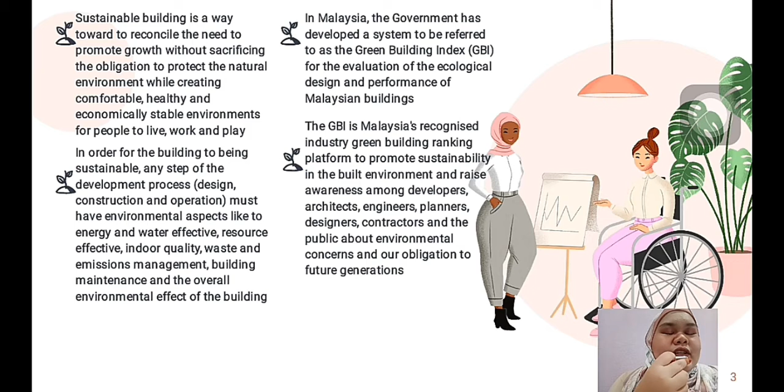Let's proceed to the challenges in managing construction activities in relation to sustainability.

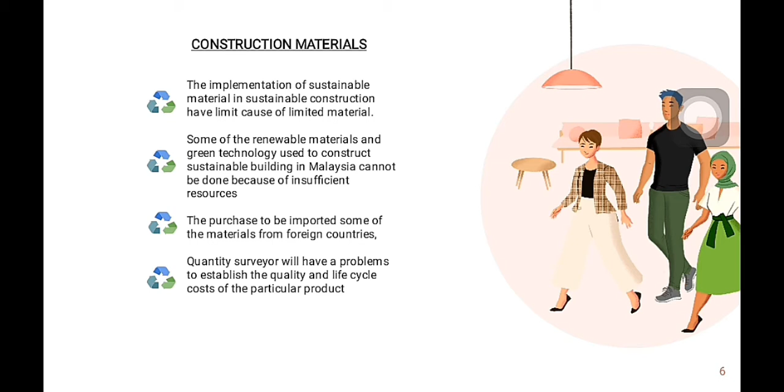First, challenges in construction material and costs: the implementation of sustainable material in construction has limits because of limited material. Second, some renewable materials and green technology used to construct sustainable buildings in Malaysia cannot be done because of insufficient resources. Third, the need to import some material from foreign countries. And lastly, the quantity surveyor will have a problem establishing the quality and life cycle cost of a particular product.

Challenges in construction costs: firstly, a higher level of green certification means higher costs, up to 30% more, to be paid for mechanical and electrical equipment installed to achieve energy and water efficiency. Next, extra expenses are incurred for hiring an environmental advisor.

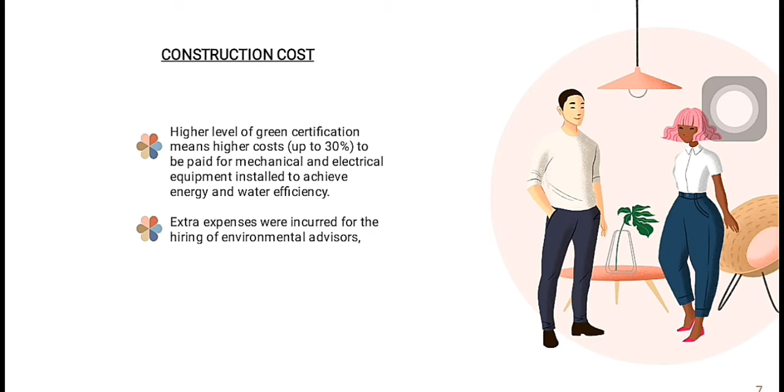For construction method and technology, firstly, the main challenge in sustainable building is the technical difficulties experienced during the construction process. There is a higher risk that errors and delays will occur due to lack of experience with the skills possessed of the construction method. Most architects still have low integration into the sustainable design process.

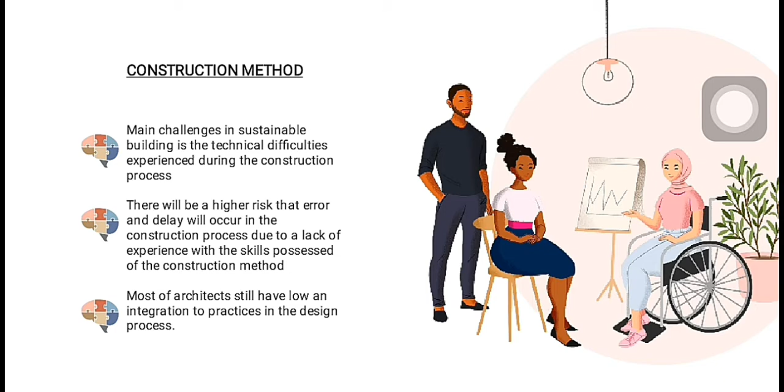Challenges in construction technology: there is a lack of sustainable technology in Malaysia. There will be higher risk that errors and delays occur in the construction process due to lack of experience with the skilled processes of the construction method.

Acceptance of new technology in construction is usually slow at the beginning due to lack of confidence. Stakeholders such as developers are not confident to invest in the high capital cost of sustainable technology because it affects construction costs. The project must have the technical capacity and financial capability to support the application. Some reasons new technology is expensive include lack of competition and commonly manufactured abroad, lack of knowledge or technical expertise, and lack of familiarity with the product, material, system or design.

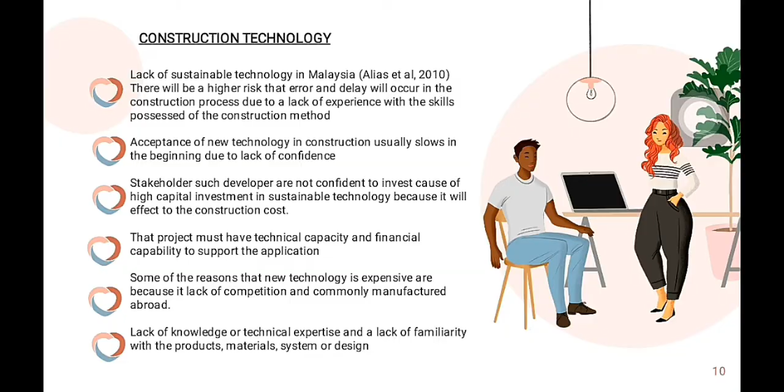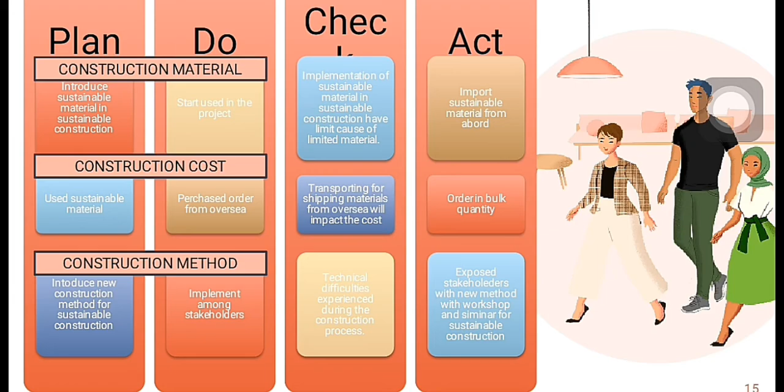Then, the role of the contractor. They must take action to do the construction work required until completion of the project. They do not always have the expertise needed, especially in construction.

In green building construction, they have to hire subcontractors or special workers able to accomplish parts of the project. They must make sure the workers appointed have the skills, knowledge, and experience, and train them to carry out the work. Contractors must ensure workers under their control receive supervision and instruction.

Then, the consultant. The consultant must participate in developing and implementing every element of the safety and health program. Consultation is required when an opinion is needed regarding any technical problems arising from the consultant team.

The situation may take varying amounts of time depending on the nature of the issue. It is the responsibility of the consultant team to study the problems in the feasibility study or in the field during the construction period. The consultant also needs to apply their knowledge, skills and experience at various stages.

Especially, safety measures shall be effectively implemented in respect of workers, materials and machineries.

Next, the supplier. The supplier will supply all the materials and goods to the construction. They must make sure all materials follow the specifications and quality. If they use bad quality or wrong materials at the site, there will be problems in future and wastage of construction cost.

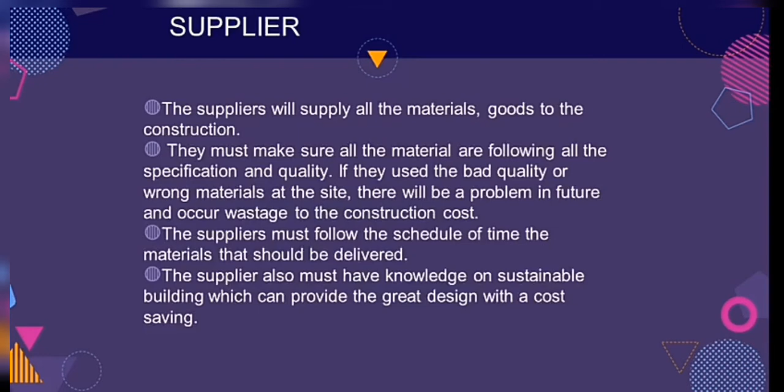The suppliers must follow the schedule of time for material delivery. The supplier also must have knowledge of sustainable building which can provide great design with cost saving.

Next, the construction worker. Their job is to do their work at the site until completion of the project. They must follow every order or instruction from the main contractor so they do the right work according to their speciality and skill.

They also must have good planning and organizing skills, as green building construction requires a longer time to be constructed. Last but not least, the authorities are the ones who give approval for construction, from start until completion. The responsible authority in sustainability in Malaysia is called CIDB, the Construction Industry Development Board Malaysia.

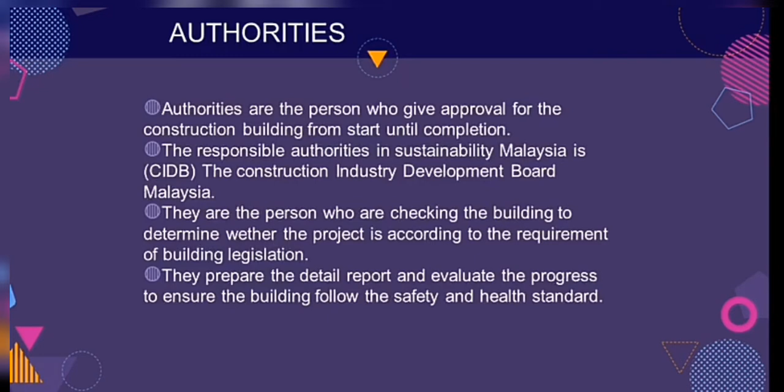They check the building to determine whether the project meets building legislation requirements. They also prepare detailed reports and evaluate progress to ensure the building follows safety and health standards. Thank you, that's all from me.

I will present recommendations to improve the current situation based on the challenges. Challenges regarding construction material and cost consist of insufficient resources in Malaysia.

In that case, stakeholders should work closely with research institutions to research various environmentally preferable construction materials and products. Second, under construction material and cost: problems establishing the life cycle cost of a particular product.

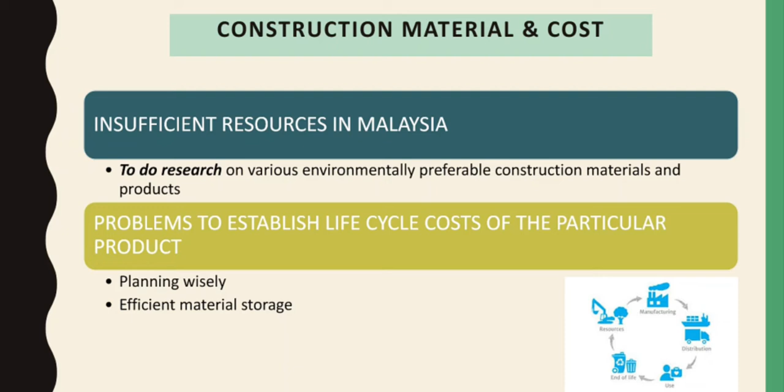This happens when products have to be purchased from overseas. So the management team has to plan it wisely, and it is also important to implement efficient material storage to keep the product in good condition.

The third challenge under construction material and cost is the higher cost of sustainable construction materials. CIDB can enforce a standard guideline for local manufacturers regarding the production of sustainable products, stating that products should be made from reusable materials gained from construction industry waste.

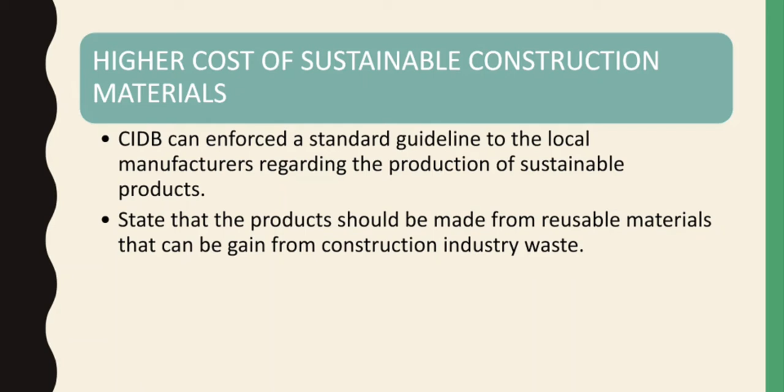For construction method and technology: the complexity of construction techniques and processes involved in managing the construction site to improve the environment.

For example, local authorities have to enforce guidelines regarding environmental practice such as for earthwork methods. This is important because development should be done in phases to reduce environmental impacts during the earthwork stage.

Second, controlling waste management such as separating and recycling waste. Construction waste can be recycled and reused for future sustainable development.

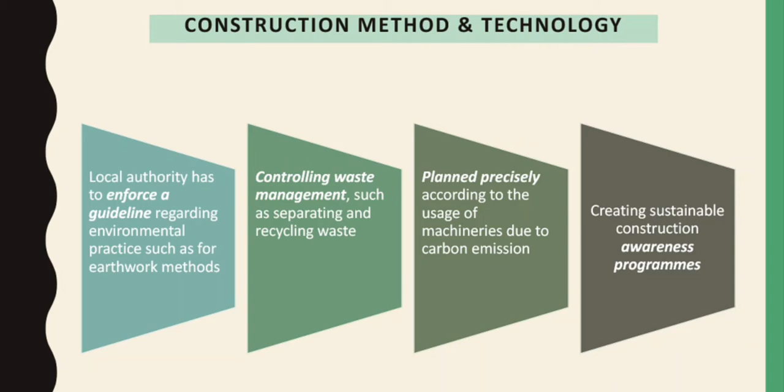Third, plan precisely according to the usage of machineries due to carbon emissions. Fourth, create sustainable construction awareness programs due to the lack of familiarity and knowledge about sustainable construction methods and technology among local contractors.

For changes in working environment procedures, the recommendation in terms of communication is that contractors have to train workers by organizing training programs to raise their understanding and awareness of sustainable construction.

For leadership, good leadership skills need to be possessed by the project manager by setting self-standard regulations, and developing a roadmap with short, mid and long-term objectives to accelerate the implementation of sustainable construction.

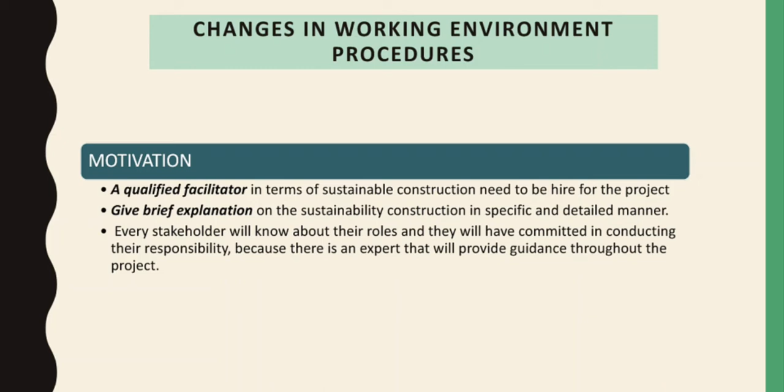It is necessary for construction stakeholders to stay motivated throughout the construction progress. However, low motivation can lead to low production and output, resulting in failure. For this reason, a qualified facilitator in sustainable construction needs to be hired for the project, to give a detailed explanation of sustainable construction so every stakeholder knows their roles and stays committed, since an expert will provide guidance throughout the project.

First, I will explain innovation. Innovation means a positive change in the status of a certain system, and it manifests in various forms depending on the nature of the system or object it relates to. Planning an innovation platform starts with a strategy that addresses culture, change requirements, and high-level allocation of resources and leadership. Most construction innovation activities are carried out at the project level and require cooperation among different parties.

The next topic is innovations that can be implemented in future projects. The first is bamboo reinforced concrete, a natural alternative to steel reinforcement commonly used in most countries. It is more environmentally friendly and creates flexibility within the concrete, enabling it to better withstand earthquakes. It also absorbs a lot of carbon dioxide and has higher tensile strength than steel because its fibers run axially and it is flexible.

The second innovation is breathe bricks, which act as a secondary layer of insulation. This pollution-absorbing brick can remove 30% of fine particles and 100% of coarse particles. These bricks are composed of two key parts: concrete bricks and a recycled plastic coupler. The surface of the bricks helps direct airflow into a cavity to remove pollution. Breathe bricks are a cost-effective way to reduce air pollution, as they require no further maintenance once installed.

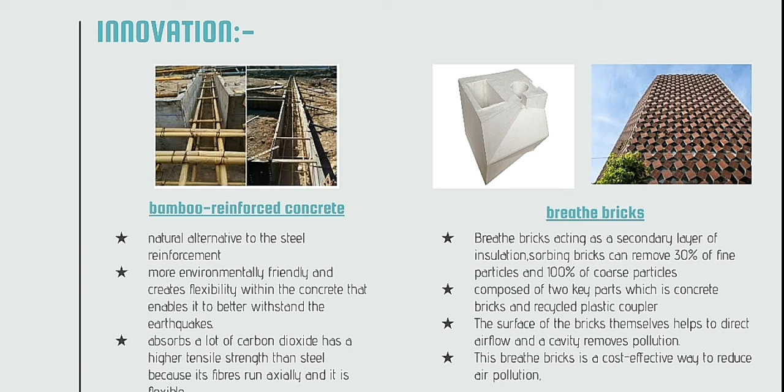The next innovation, especially for tools, is changing PDCA to PCDCA. In these tools, we introduce a 'C', for check, after 'P', for plan, to check first if the plan is ambitious enough. In other words, before the 'do' phase, the project team should set expectations on the outcomes of 'do' in terms of innovation. Otherwise, the outcome will solve the problem, but is unlikely to be innovative.

First, continue with the plan, followed by do, and deliver the improvement. Revisit the plan and modify it until it is capable of delivering an innovation. The plan depends on the combination of the problem definition and the solution chosen by the team, and clearly indicates whether the result will be innovative or not. Adding a check after the plan sets the right expectations for the project.

The last innovation stated here is sustained focus and interest over a long duration for the team. Similarly, the PCDCA approach needs more tools to ensure managers are able and allowed to focus and invest the 'do' phase on longer-duration innovation projects. They might need to add more tools related to risk assessment and mitigation, designing new business models, open innovation, and so on.

With the help of these tools, efficiency can be brought to accomplishing the desired job, but behavior is most critical. The behavior and body language of leaders and superiors decide whether innovation is delivered. So, using the modified PDCA to PCDCA does not mean it is better than improvement — innovation, improvement, and standardization need to coexist in any organization.